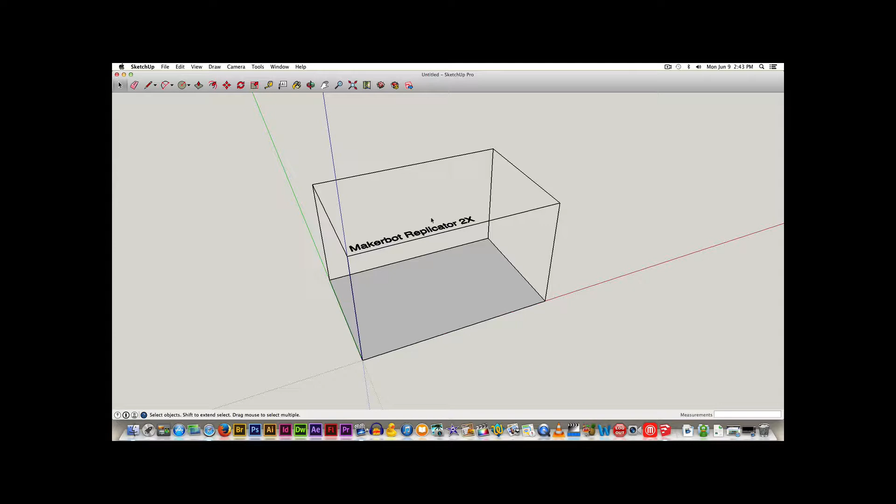Inside of that, you can see that I have a framework for the MakerBot Replicator 2X. Just coincidentally, we happen to have the MakerBots as one of the printers available in our lab. But we're going to go ahead and delete that frame, and we're just going to build something here that looks like a Lego block just for fun.

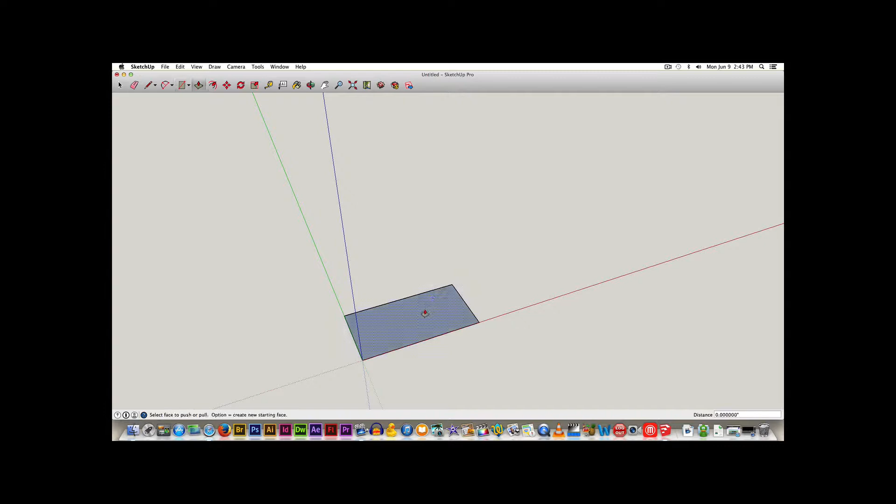So let's choose our rectangle tool, and let's make something here that is 5 or 6 inches. And we will select our push-pull tool, and then we'll actually grab our circle tool and put some of the little circles on top here. This doesn't have to be exact, we're just having fun just to have a model that we can demonstrate on.

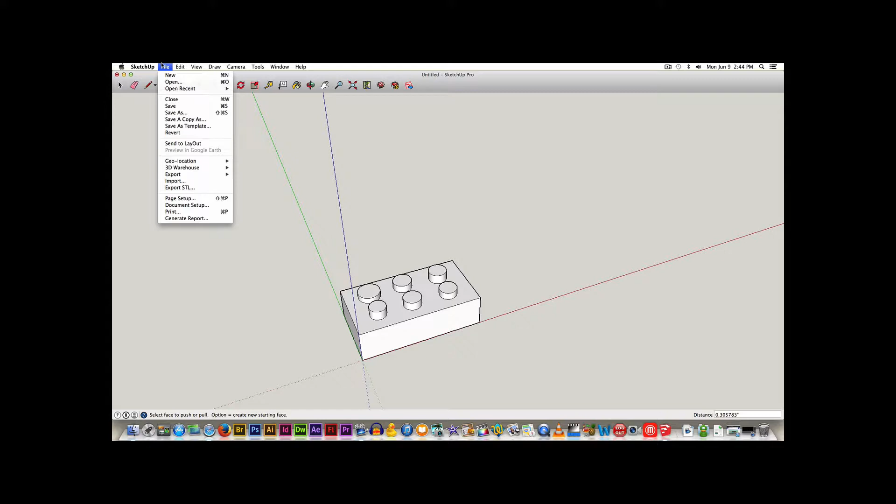Alright, there's something that looks approximately like a Lego. So we're going to export that to an STL file, and in the MPS we have the Export STL plugin on all of our machines.

If you don't have that, if you're working from your home computer, you can certainly get that plugin. It's free of charge. STL is the most portable format for attempting to do 3D printing. It's just the easiest way to get a file out of one machine and into the other.

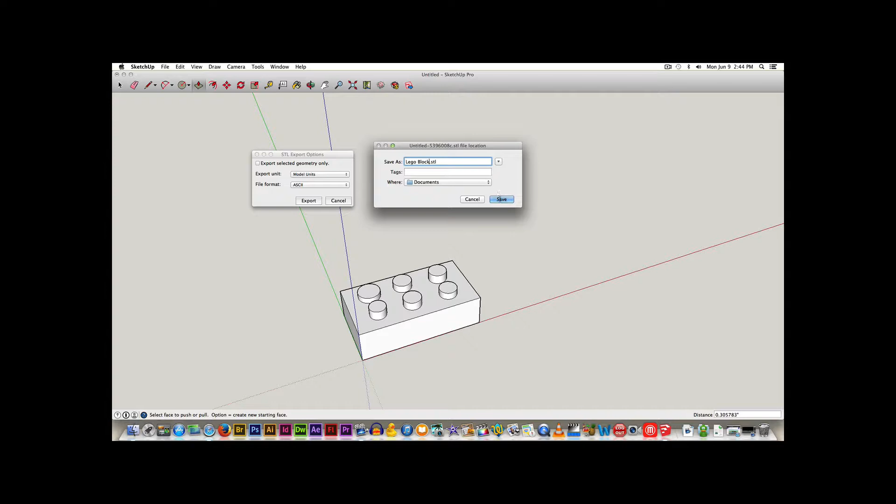The default settings for the export are just fine, and we'll call this something, just a file name that we can find. Okay, so we'll save that off to the documents. Alright, once that's done, we have a printable model.

And I'm going to close out SketchUp here, and I'm just going to verify that model as well. And let me do my Pleasant 3D, which is also a program that is installed on the MPS machines.

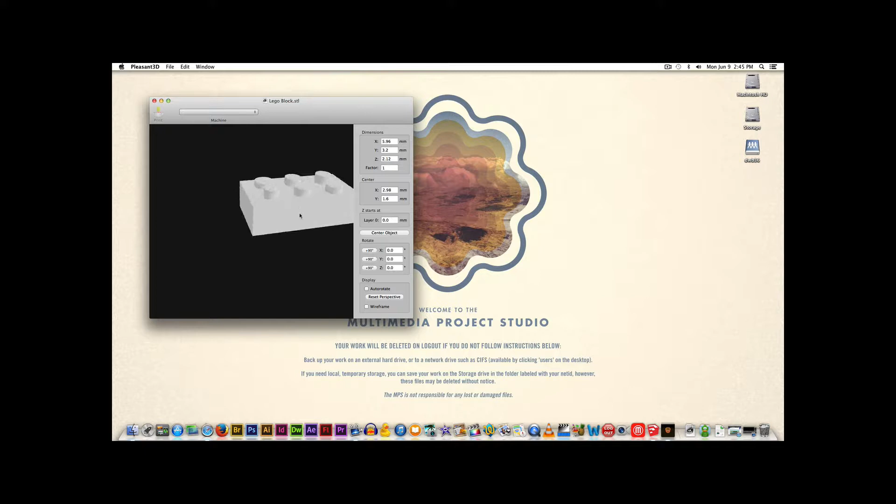We're going to do open, and inside of our documents you can see that we have our Lego block saved here. This is just a good double check to verify how things are looking. You can see that there is our file, and we can look at it through a couple of different ways. It's always good to kind of check the wireframe.

STL is based on triangles. So every object, no matter what size or shape, is just a series of triangles stacked together. So that helps to see it.

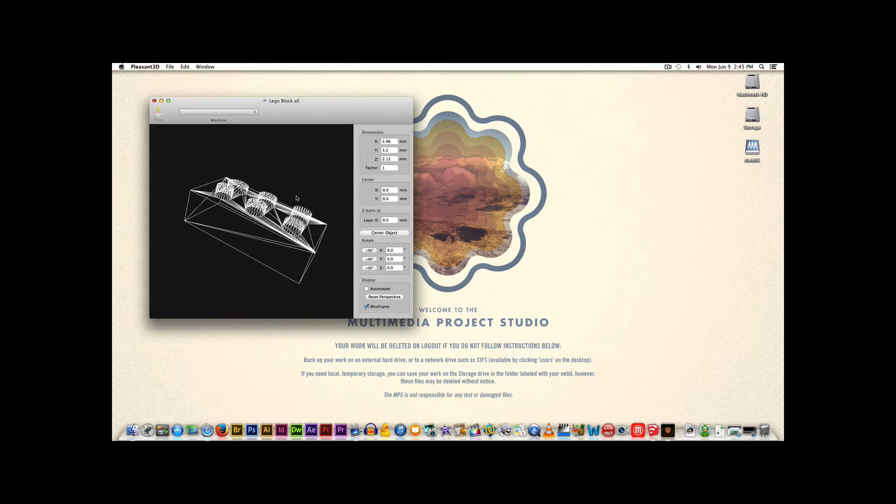And now with our file verified, we can go on to the next step of getting that into the printer and printing it. Before we wrap up, I wanted to leave you with a quick note.

In this short 4 or 5 minute training module, we're only able to show you SketchUp at a very, very basic level. It's an extremely powerful program and will do much, much more than what we were able to take the time with here.

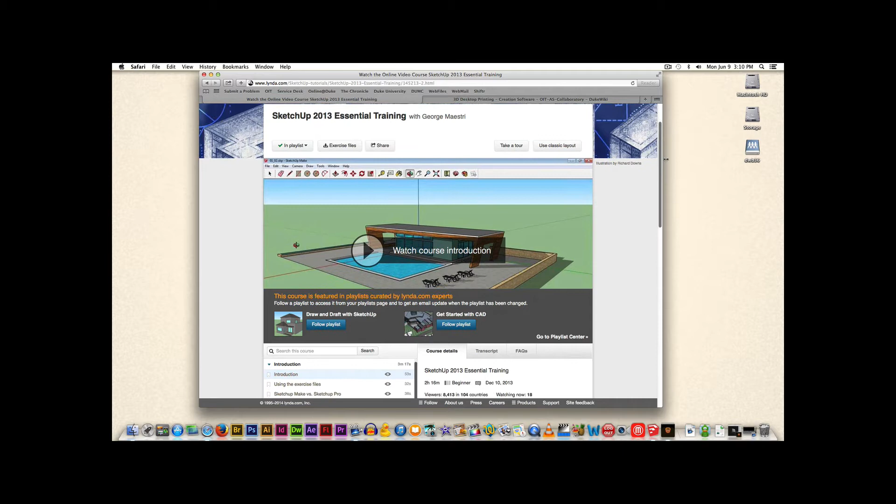I highly encourage seeking SketchUp training if you're beginning to explore 3D printing and taking it seriously. Lynda.com is a great place to do that. All Duke students, faculty, and staff members have access to Lynda.com, and there's several training modules on there as well, including the SketchUp 2013 Essential Training, and there's an intermediate version as well. Each of those 2 modules takes right about two hours, and it's worth every minute that you can take to invest in it.

Outside of SketchUp, you're not required to use that specific tool to create a 3D model. There's a ton of other 3D tools out there, and we have developed a short list of them off of our wiki, and we've been sort of keeping track. You can see that we've attempted to be thorough, but there are so many products on the market that you have near infinite possibilities for what you can choose to generate your idea.